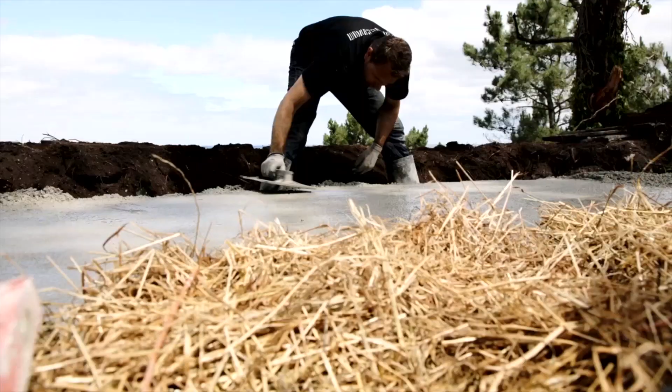So this is an early project that we did not really knowing what we were doing, just by removing and putting together everything that we found on the site, on the place, a beautiful cornice of the Atlantic, and putting together the existing matter, a bowl of soil just removed from the place, a volume constructed with hay bales,

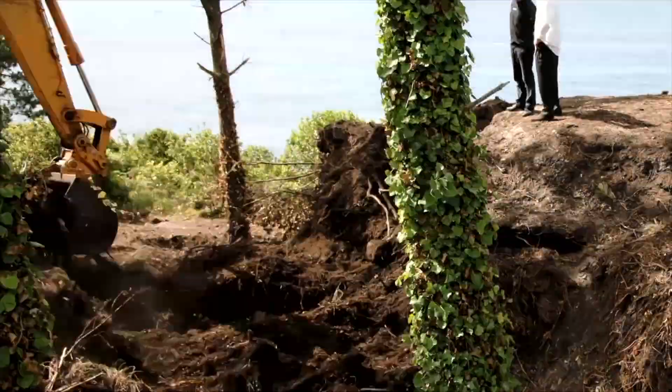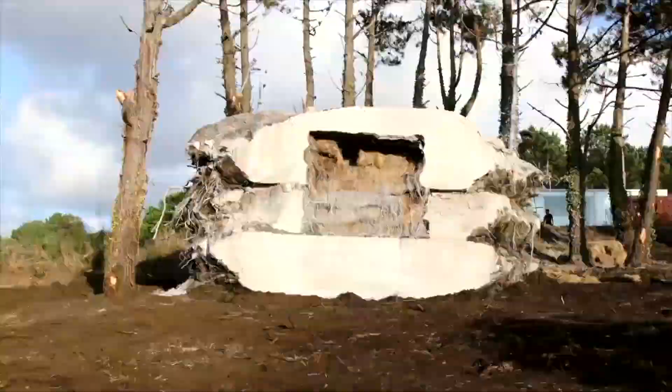and we casted unreinforced concrete on it. We covered it, we contaminated this prefabricated chunk of matter, this stone, and we let it there, like cure. And we named it the truffle. The truffle almost as a parasite of nature, something that grows informally attached to that savior, to that life that is part of nature. But it was not yet an architecture project. We let it there, rest for a while, not really knowing what we were going to obtain from it.

You can put a little bit more of music.

And what we discovered was this, like, different lives of concrete. All these abrasive, viscous, very expressive material that was reacting to the cut that we had just done, even though we hadn't yet revealed the space. No? But we were already seeing all those encounters between architecture and landscape, all those age, all those wrinkles. We didn't have yet the tools to transform that.

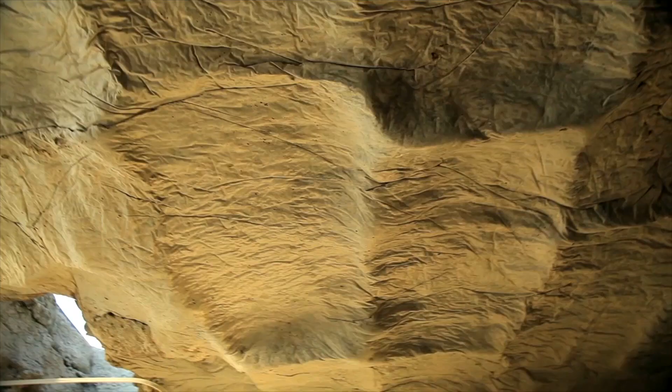All this rusticated viscosity, warm and aged already, contrasted with this liquidity of the lintel, as a petrified sea that was above the habitable space. And in the exterior, that informality that gave ultimately a figure to the truffle.

So this project stayed in our hearts for a long time, and a decade after, on the other side of the world, and this is what makes architecture so fascinating, we had a call from a couple of fantastic allies that wanted us to do something in this extraordinary, untouched landscape close to the Rocky Mountains.

In that place, these are called the Beartooth Mountains. This is where the continental and the Pacific plate collide, and it's another edge situation. It is where the Rockies stop, and suddenly there's kind of a cloth of hills. As you can see, without a tree, without a reference, without anything but cattle and wildlife,

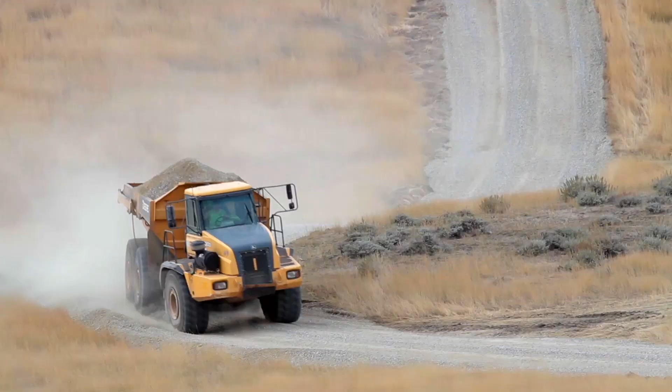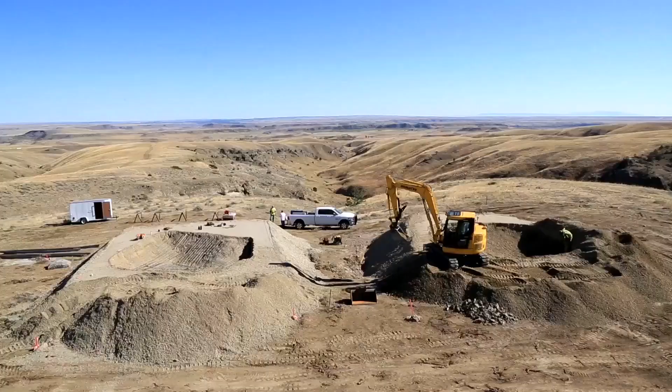but always with that mountain on the border. So we were asked to do an art center, and we declined that idea, saying that we couldn't incorporate any kind of referential building or human construct into that place. That would have ruined the experience of the program, which, by the way, was the contemplation of art, music experience, concerts, sculpture, but always in a special communion with the terrain, with the land.

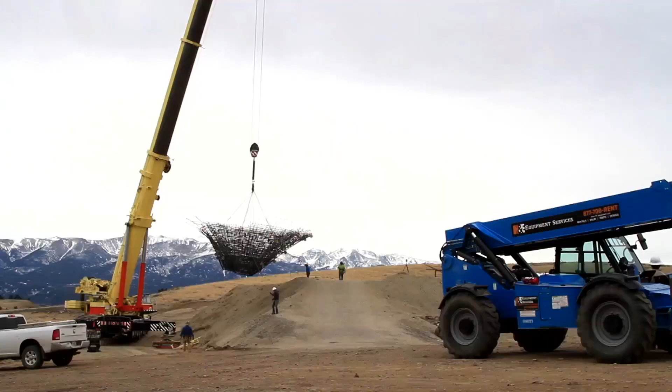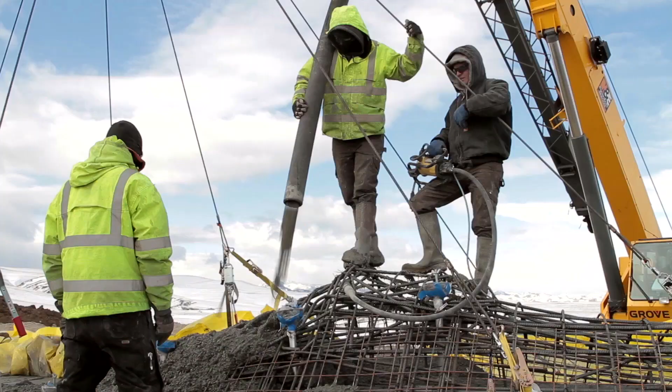So we created a craft, a tectonic, and a language that had to be, we called it, pre-architectural. We tried to avoid any kind of reference system or procedure that we had previously known. So all our actions, as you can see in this video, were to emulate the gestures of the geologies of the place, use the concrete as a very, very artificial conglomerate of all the soils, the crushed rocks, the pigmentation, but all done in a very wrong way, the anti-Swiss mode of doing concrete, no?

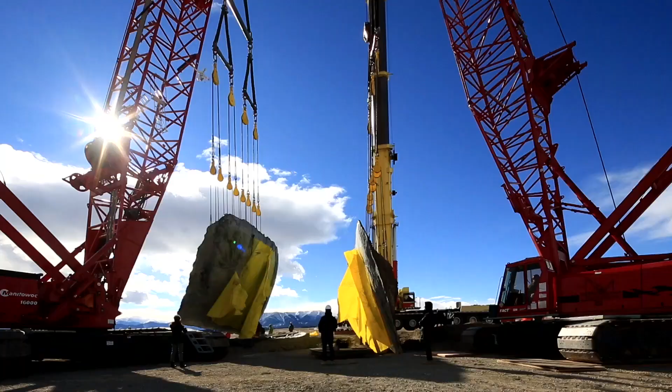Just breaking all the given rules, not mixing properly the cast, wrinkling the formwork, throwing the pigments, contaminating and giving, let's say, weaker resistance and not considering the thickness. And also reserving this fabulous moment of unearthing, of birth, no? All that excitement of a gravitational,

I would say, initiatic moment, no? That slight contact, that crush, that connection, that arch is actually the portal, the entry, the door of the art center. The art center being a constellation of pieces that refer to each other as stones or as stars that were dropped there.

So these situations of very primal equilibrium, informal and, I would say, raw, do create within the program the entries to that experiential or human world that was previously occupied by ranching and wildlife activities. No? So without being very disruptive, we tried to immediately connect with, I would say, the primal souls of the place. These kind of totemic figures.

We discovered that they immediately connected to the very sophisticated art curators coming from New York and to the ranchers. There was something in those masses, true masses that were, I would say, rooted to that place. But this is a building. This is a piece of architecture. This is not sculpture. These are rooms that have a program.

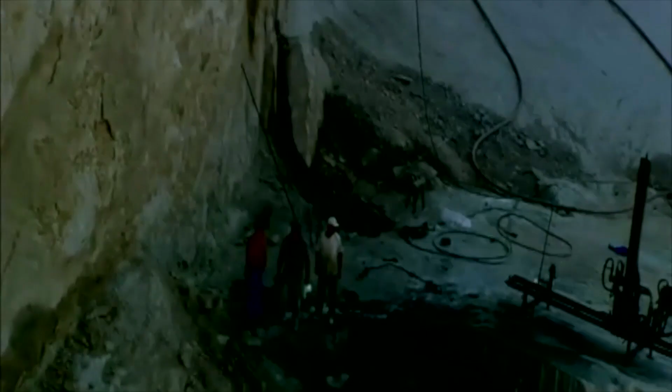Or a second project that we did in the same plot, also in Santiago de Compostela, where our challenge was to go a little bit backwards within the culture of Santiago de Compostela that is well known since the early medieval ages. But there's an outstanding megalithic culture that goes from Galicia all the way to La Bretagne, with a lot of megalithic constructions that we want to honor. So we had the capacity to somehow convince our historical commission that our look to history was longer than the city, but still part of the place.

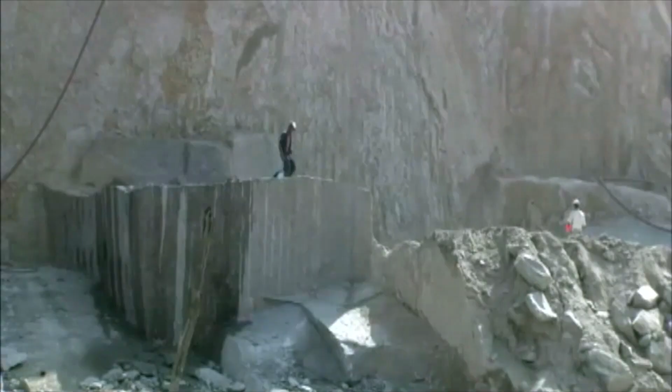So we wanted to make that connection between the megalithic tectonics and all its limitations by mass, weight, and cut of these pieces, and the context of the place. So everything starts with an explosion. I mean, it's really violent, and this is what makes so fabulous this destruction, where everything that we produce begins. So we wanted to go to that origin, to that Big Bang, to see how all these initial pieces that are obtained through explosion or through the first cuts, that are extremely raw, could be used as an immediate architectonic part.

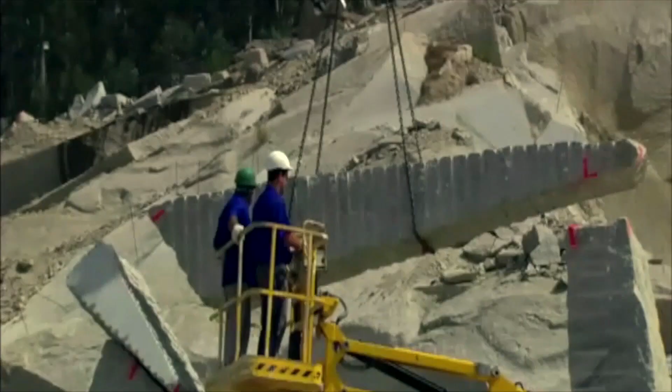Of course, we didn't have laser scans or photogrammetric techniques. This is pretty much 15 years ago. So we had to do it using the scientific method of trial and error. So we started to understand how important it was to be able to prefabricate something, to test it, to make it, to develop the technology, to develop the expressiveness, and ultimately to do the architecture project and the engineering. So everything started in the quarry, where we pretty much moved all our practice for several months.

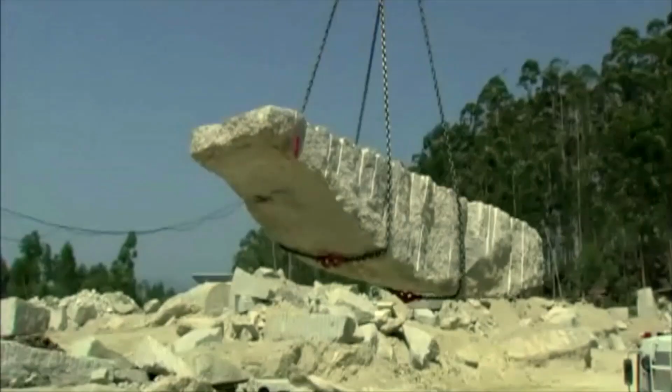I will never forget that experience, because we had to choose, identify, pretty much sketch rapidly and try to figure out where the center of masses were, more or less, so we could find a way to grab it with those chains, convince all these guys to use their tools on our behalf, not just to crush those stones or cut them, but to precisely locate them in the places and in the order that we were dreaming of, because again, we had not yet done the project. We had the license, we did something to serve the municipal government. It was blurry enough that we could pretty much do anything.

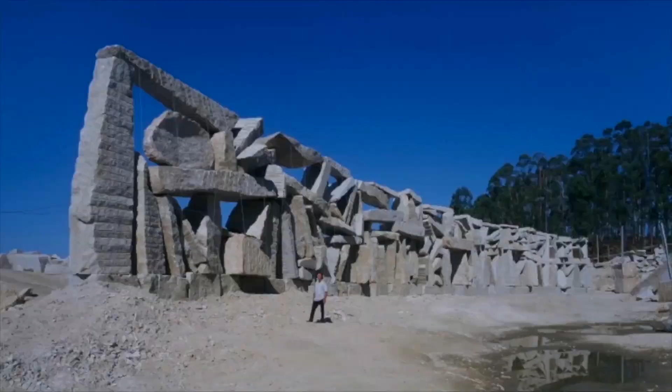And here is where we make use of the art world, because everything that is artistic is free. So even though it's a structural wall, perfectly performative, and it weighs 1,000 tons, we could hide this structure under the idea of being an artistic facade, or I don't remember how we named it. The fact is that we started placing one stone after another, and that went out of control, and we actually built the full structure in the quarry. It was beautiful. We measured it, and I still remember when I called my engineer, and he came to the quarry. He says, "It looks pretty good, actually."

But there was no way to anticipate the performance or the behavior of all of those stones that were placed there. Even though I always say that this is the most stable and safe structure I've ever built. Firstly, because I did it twice, and I could correct minor encounters. And the fact is that when we dismantled it to redo it on the site, here we were also the contractors. I operated as GC, as general contractor here. I think it was the only way to be capable to do it.

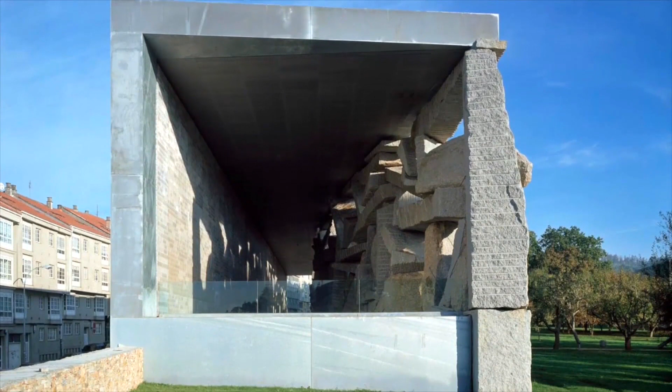But we discovered that once we had placed those stones in the quarry, by signing with a red spray where those gravitational connections were happening, we really were able to rebuild it in a fraction of the time, in a very safe condition. It seemed like those stones had already found their place and they were comfortable in their position. But again, the ultimate idea is that all these chunks of matter, redistributed and reorganized, become part of the architectonic part.

And now I'm in Menorca. Music, please. And this might be, I don't know, one of the last projects I do with this attitude. And this is the most radical, because in this case, I'm just not doing nothing. I had the fortune and the chance to find this beautiful abandoned mine in Menorca, and I just have to clean it and use the technology not to ruin it.

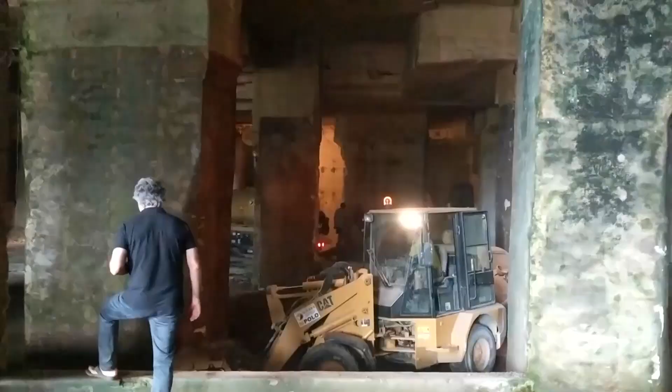And find a program, by the way, because I know I love it, I want to use it, but I don't know what to do with it. So we started this by inserting light and air, no? As this first stone, this ceremonial moment of birth of architecture. We did all this event of chopping a stone from the lintel of the quarry with a little olive tree that arrived almost dead.

But we put it vertically, and through this oculus that is 9 meters deep into that gut of the terrain, we understand this is the first stone, the keystone of the equilibrium of all that given fruit of the earth. The rest of the project was 3D scanned. Look at these beautiful drawings. I would love to say that these come from my gifted hand of representation, but they're just the 3D scans.

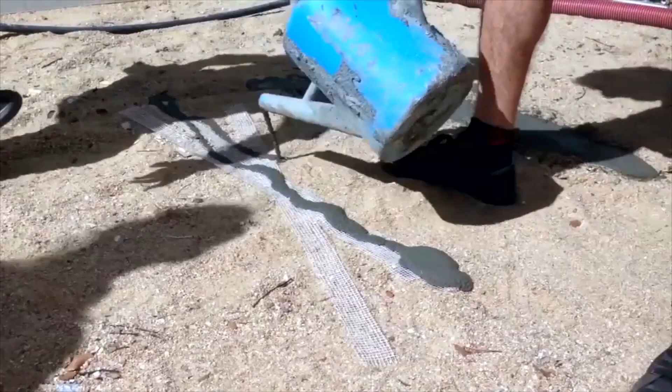Now we are doing. When I mean now, I mean that I was doing it yesterday. So not this part, but what you're going to see in the last. I think it's a non-edited video that I produced rapidly. But I think it was interesting to understand our vision of the architecture of the earth.

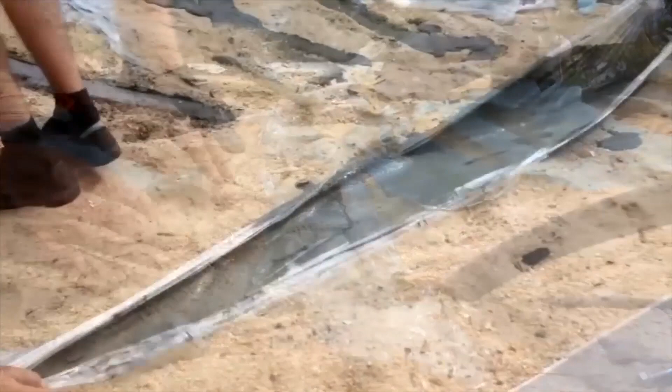This is an installation. Installation is a hybrid between an art piece and an architecture construct that we were commissioned to celebrate a big exhibition that's going to be held in New York, in the Cooper Hewitt Smithsonian Museum, about nature. So they told us to do something in the beautiful garden that they have in front of Central Park. So we presented, and they accepted it.

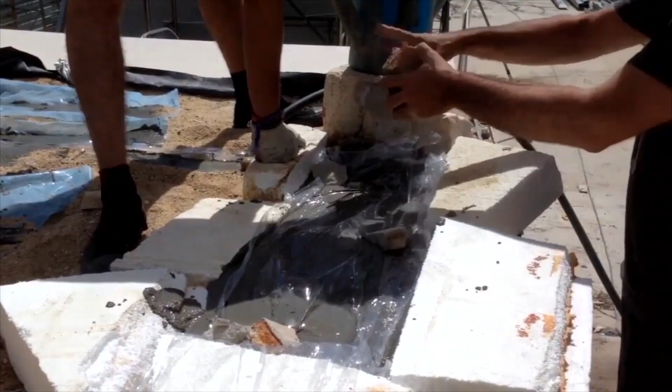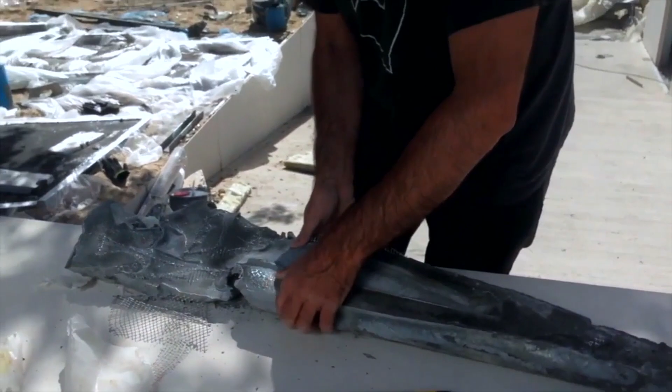We said that we were going to prefabricate a river. We knew that before architecture came to Manhattan, we gridded everything and we flattened and we have that beautiful and amazing city that we all love. Before, the island was full of hills, rivers, and a lot of natural beauty that was not erased; it's there, it's kept, it's hidden, souterrain. So we're going to lift it, and we're going to fabricate this metaphor into a massive concrete structure.

So that river, this is all, I would say, the sketching process where we produce a lot of rivers, and some of them were structural, some of them were part of the standing point. So all these traces of structure, these beams, are performative like any other structure.

In the meanwhile, we were commissioned to do a little passerelle in China. So we used this same idea to create a bridge that was not jumping from street to street, it was part of the river. So this bridge was designed through all those traces, and we faced here a dilemma, is that we loved them all. We didn't care which fluidity was part of that building, that structure.

Understanding that when that concept is clear or knitted enough, the formal aspects of it are pretty much irrelevant. I think this is something that is very, very surprising. It's like if you look at stone, and another stone, there's no formal preferences.

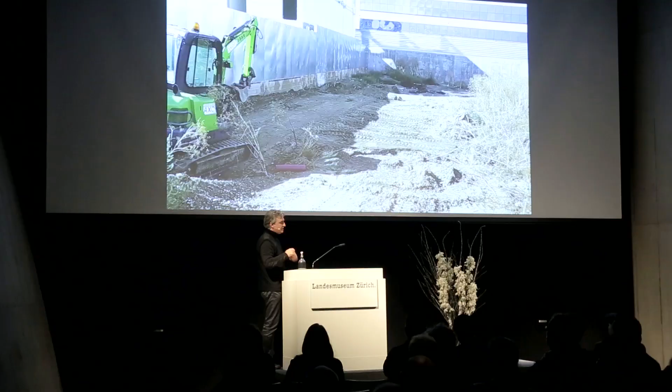So after all this back and forth from a conceptual part to a more urbanistical relationship with the landscape, now we are abstracted, and these are images of last week, pretty much, where we did the prototype. It's not the real structure, but we did a prototype, and the prototype is in scale, I would say, 1:2.

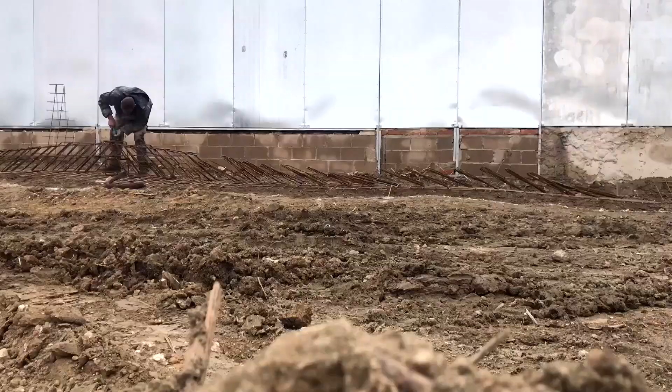So we will build another of these petrified rivers for the museum, but we wanted to rehearse it, to test it, not only mechanically but also the materiality. So as you can see, everything departs from the terrain with small preparation, a lot of uncertainty, and this is the contradiction: how the formal and, I would say, metamorphical uncertainty that is given by the fluidity of the concrete when you let it loose has to be combined with a total precision of where those tensions travel through the guts, the reinforcement.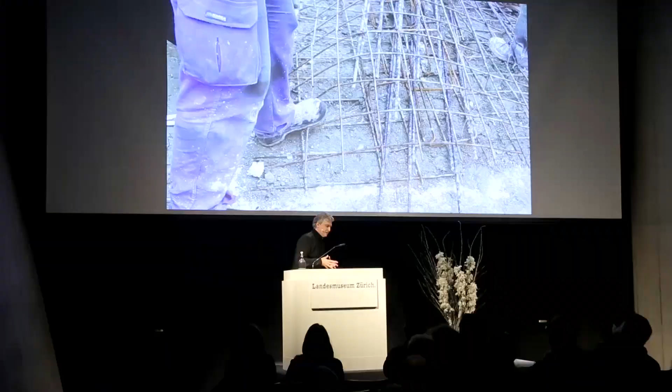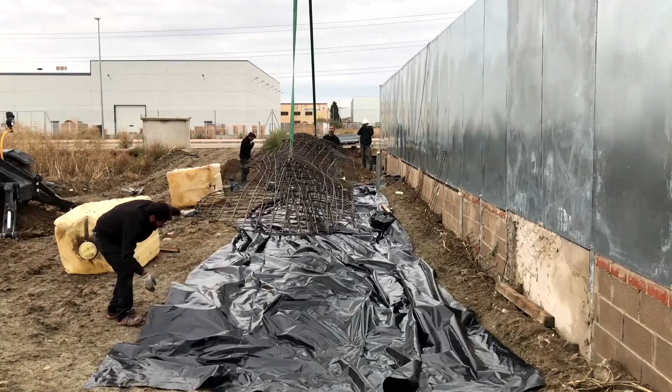So the combination of what you leave as freedom and what you control as the driver of that freedom is what we were working. So we decided to make a very simple differentiation. We were going to fully control the reinforcement and leave the liquid part of the composite beam pretty much flow and create that beautiful and poetic form.

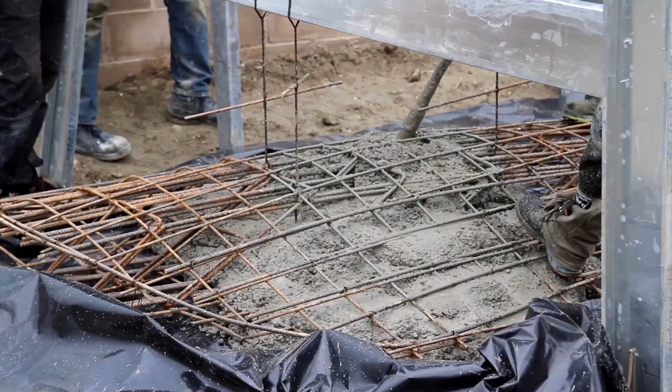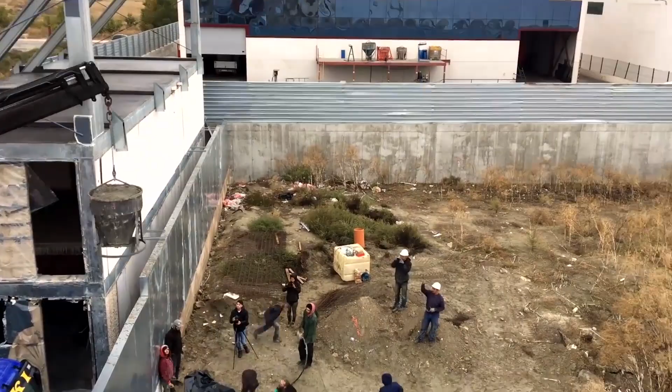The specific characteristics of this technique is just controlling with a little bit of extra sensibility the plasticity of concrete. So we just add more fluidificant or more water, depending on which part we want it looser or straighter, or just to maintain it, and the amount of vibration. So somehow we are working with that forces that we apply constantly to matter, to try to depict with them the ultimate appearance of the project.

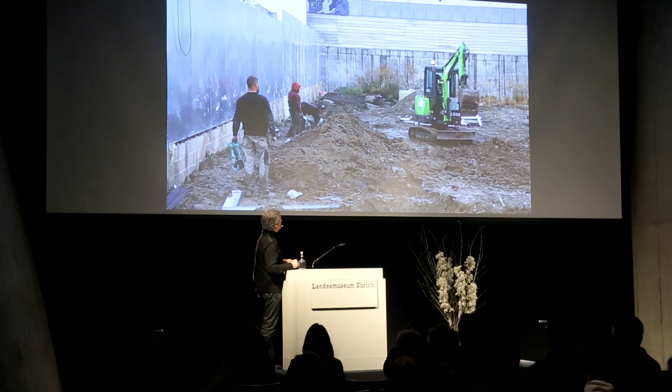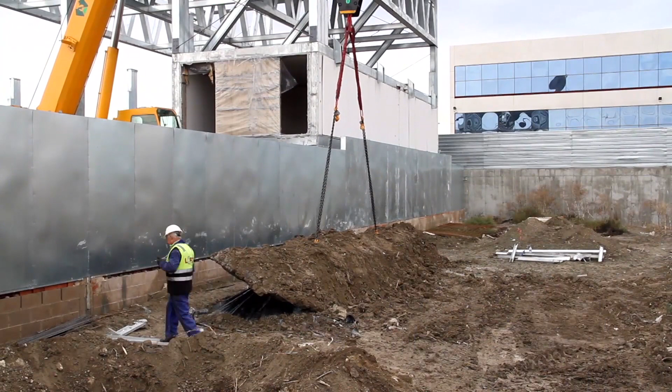Again, we want that contrast between the part of the river that is unearthed and the part of the river that is pressurized, fluid and liquid, and crystalline. These two natures that we firstly worked out in the little truffle, again in the structure of landscape Montana, here is revealed as a very intrinsic part of the expression of this piece, no?

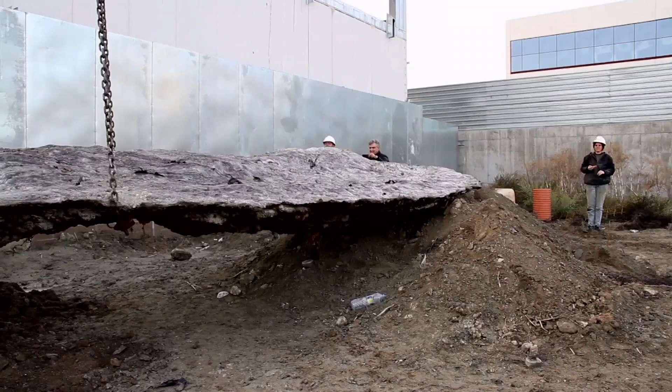Dangerous stuff. These 22 tons became a structural beam that worked out very well in the deformation tests, like any kind of architecture structures. But formally, it had this kind of appearance, this kind of abrupt and very expressive face, surface, where we could ultimately create that landscape, an onirical scale landscape, and also that, I would say, stiffness enough to fly and to be kind of unveiled over the existing soil.

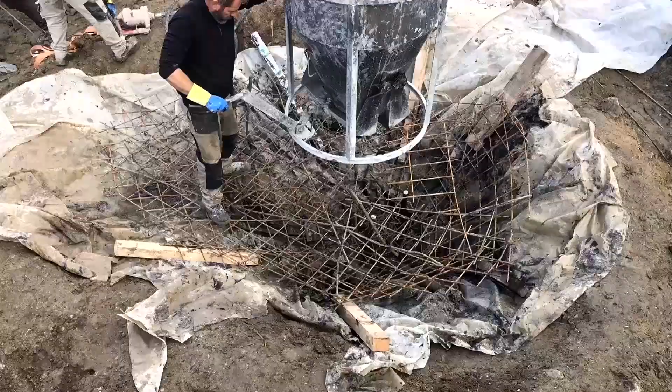The other piece where the river flows is to a lake, a pond, or the sea. So we are creating a big vase, almost like a Baroque fontanone, no? Where all that water and all that inertia and all the equilibrium of this long structural trace parts. But this structure that we casted last week has a very important engineering prefabrication skill. It will pretty much fit in the middle of this auditorium, a little bit smaller, but it has to be transported to New York.

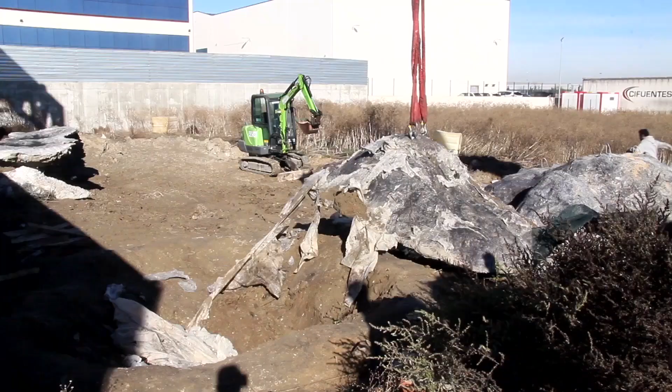So we're using prefabrication techniques of breaking that vase into parts to be able to reassemble them, like in any building. The difference is that while in buildings we love to distinguish the parts or disvanish them with an unseen joint, in this case we wanted that joint to be a wrinkle, making that match of the liquid wrinkle part of the argument. So the prefabrication is independent of the formality of the building.

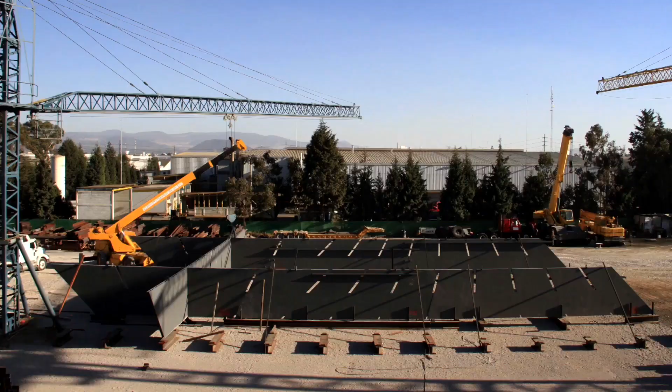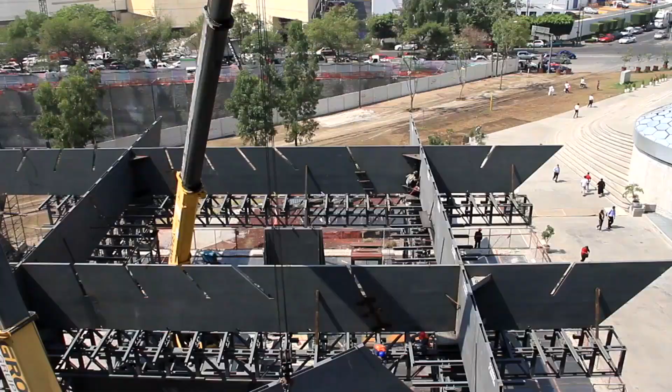This is a theater that we built in Mexico City, where the nature of the assembly, the prefabrication of the parts, was also part of the tectonical logic and the form. We wanted to create another stone. In this case, we call it, in Spanish, la piedra del sol, the sunstone, la dovela, la clave. These are very, very metaphorical visions of Mesoamerican Azteca culture, no? Of almost sacred pieces of their imaginarium, no? That relates the sun as a stone to the figures that we create as humans as stones.

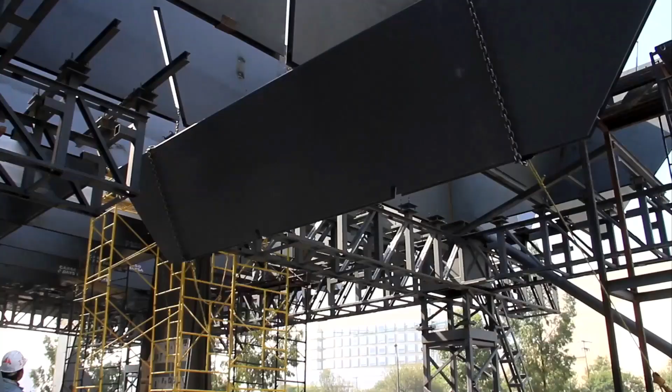So I wanted this capacity of the sun, the light, and the gravity to be combined in a special way that you could feel all these presences. It's just a structure that levitates over a big hole in the ground.

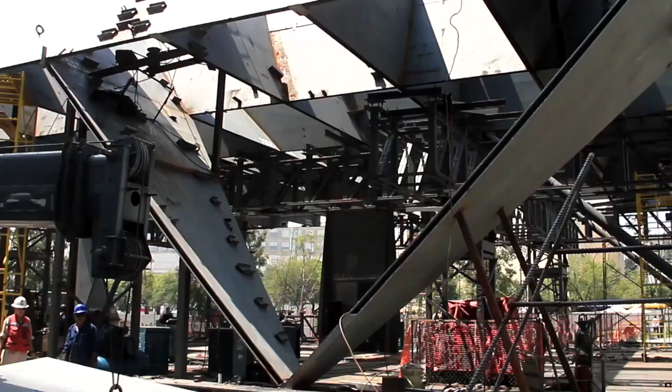So everything was the equilibrium of a big excavation that held the black box of the theater, and that levitating stone combined with these bidirectional steel plates that would operate as a very symbolical figure that could represent the existence of that hidden gem, that space that is totally excavated.

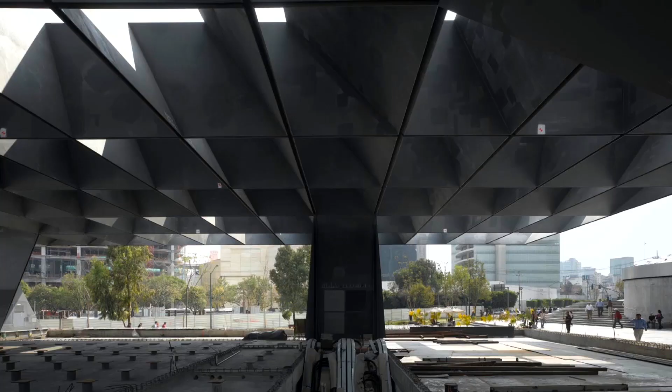No? So we built all this excavation with everything covered, and one day we just opened, and most of the people that were in the rest of the buildings didn't realize what was going on inside. That was a very interesting moment, no? As you can see, this dovela operates with its deformations over the 4 columns that hide into their form, their deformation, and their position. They hide their gravitational consistency, no?

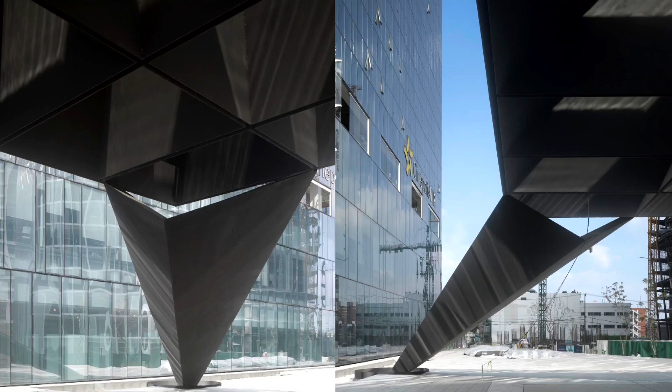And that's why, let's say, all the gravitas, all the weight, and the distinguished light that becomes part of the matter of the stone, not as a projected light, is what makes that construct of the dovela interesting.

In the point of view of the place, of the city, this little building was surrounded by huge towers and museums and big buildings. So we wanted to make a very, very silent, 5-meter high canopy where the presence of space was defying the formal monumentality of the neighbors.

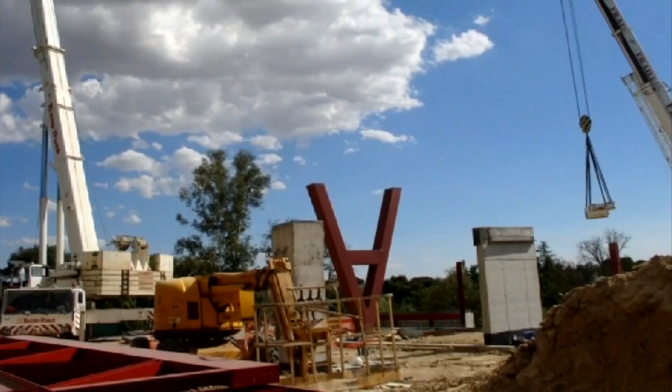And in parallel to these last projects, we were building a house, the Hemeroscopium house, where we wanted to celebrate this logic of prefabrication to the ultimate case. So we just went to a catalog, off-the-shelf civil engineering, I-beams, slabs, vaulted artesas, I don't know how to say in English, this beam. And we just reorganized them in an unprecedented way.

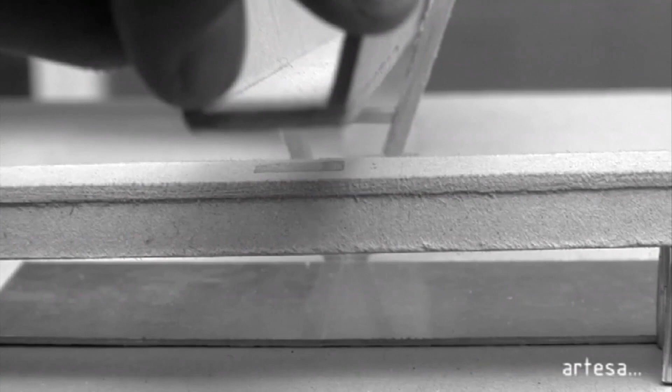Again, differentiating between its formal conditions, the I-beam, the U, the slab, with the pretension and the post-tensioning connections that were all, as you could imagine, fully custom. But I wanted again to detach the performance, the stresses that flow through the guts of those forms within its form. And I think this is what concrete offers us, this versatility of operations, of performance.

In terms of the formal aspects of each of these pieces, we're just interested in creating a gravitatorial itinerary, a helicoidal transit of that transmission of gravitas to create a certain space that was balanced by the action of those heavy presences, those heavy traces of those beams that were defining a space without enclosing it, a courtyard house in this case.

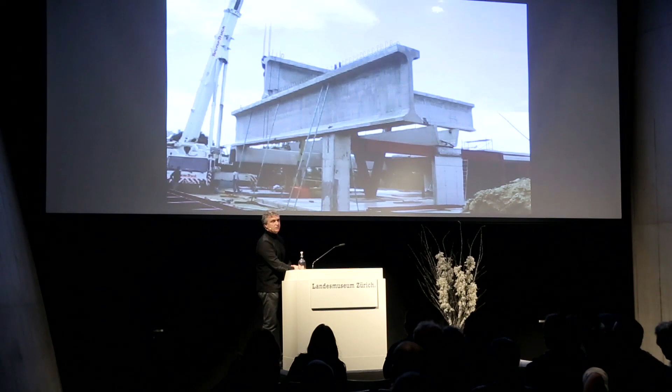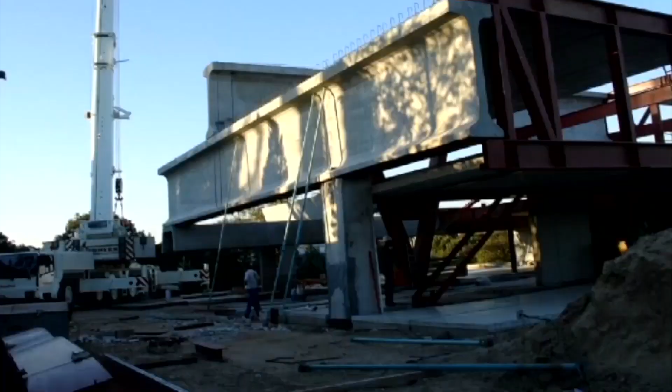And ultimately, what we were, again, surprised is how the space became extraordinarily light and transparent and fluid, even though it was constructed by these very, very heavy pieces. Heavy and pretty much soulless pieces. How indifferent is the form of an I-beam to the rest, even though it was designed that way to really perform efficiently.

But it becomes part of a cornice. It becomes part of a facade. Suddenly the beam is not a beam anymore, it's part of a wall. So it acquires a different significance just by participating in that conglomerate of pieces, just by being incorporated to a system and just by detonating that spatiality. That spatiality that was cut.

That itinerary of gravity was counterbalanced by that keystone. Again, the same word with different meanings. That keystone that we call the G-spot, that is perfectly located and closes the balance of the structure. And that was a gift of the quarry guy.

And this is the result, the transparency, that integration of those traces to the wrinkles of the landscape. It is the reversal of what we tried with the truffle, where all the space was wrinkled and the landscape was providing the single line. So I think these dualities between geometries, masses, and forms is what become part of the architecture discourse.

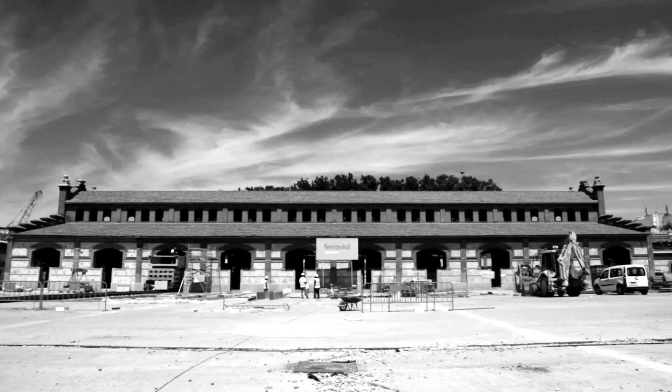After doing this house, we had the chance to do a historical transformation of a slaughterhouse into a mediatheque. And this building was fully protected by municipal government, untouchable. So the only thing that we could do was solve the hygiene of the walls, incorporate MEPs. But by doing this kind of celebration of the engineering, we could convince everybody that all these pieces were part of the mobile, of the furnishing of the house. Something that you inserted through the door or through the window.

So it was accepted, even though each of those weighed 50 tons and they have an independent structure, but they were part of that mobile tectonic. It came up, it was inserted, almost sneaking into that space, not becoming part of it, not touching it.

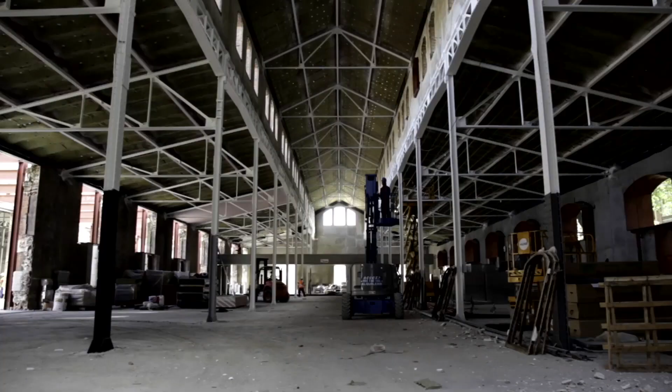So here we learned another lesson about the structure. Structure of a building doesn't have to support anything. It has to contain. It has to add order. It has to provoke that kind of dissonance through its presence. This is the kind of exercise that we produce here. We inserted into that system this very impure, almost unprecedented part that pretty much contradicted all the existing structure.

The collision between the fragility of that metal structure, the trusses, no? The order, the vertical, almost a basilical space, being contradicted or sometimes defied by those, let's say, transversal and horizontal traces that didn't touch each other, but they operate simultaneously as a sole structure. I think this is the most surprising part of this project.

No? This collide, this encounter of these two artifacts that don't recognize each other, don't touch each other, don't even respond to each other, but they were working as a unit. No?

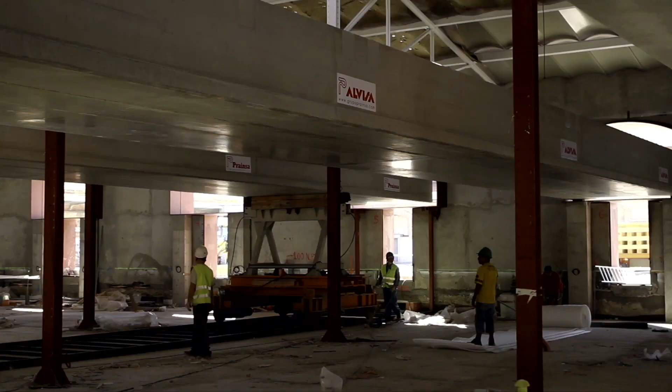And all this could be again done through the development of these prefabrication techniques. No? So we have to use the craft of the engineering and the logics of the offsite to respond to our ideals. And I think this project does respond properly, no? By inserting and doing all this kind of engineering effort just to introduce these structural parts into the core of an historical building.

And by doing that, the transformation was integral, and the basilical slaughterhouse never felt again as that industrial building. Suddenly, the space had been extraordinarily reinterpreted. And I think this is one of the most important goals of architecture in these interventions in existing buildings that do have a history and do have a past that is sometimes difficult to transform.

This compound of slaughterhouses in the center of Madrid, in Matadero, now is part of a cultural network of emerging art and initiatives, younger initiatives that used this pretty much residual infrastructure, but required a total reinterpretation and transformation.

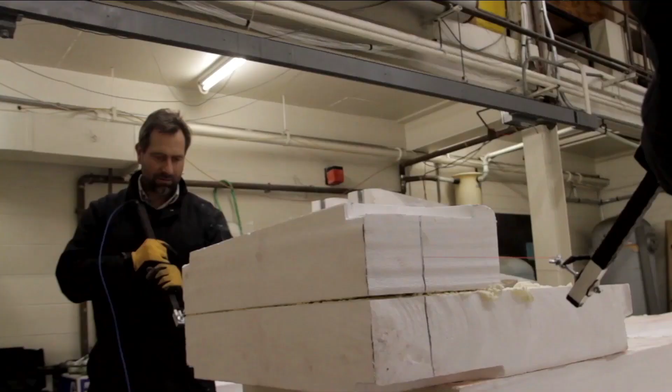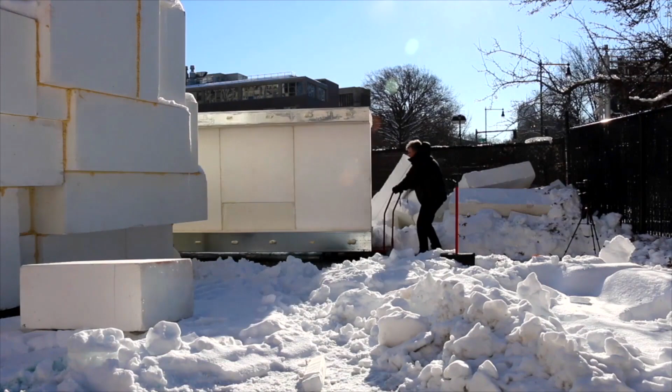So all these buildings that I've showed you occurred before, except the ones in Montana. But this before I went to the United States, to the MIT, to found a lab called the POP Lab, Prototypes of Prefabrication. And this occurred like 5 years ago when I moved there, and I had already been researching all my career, so the idea of starting research was kind of unpleasant. So what I did was to continue the research, but challenge everything that I had done before as a mental exercise.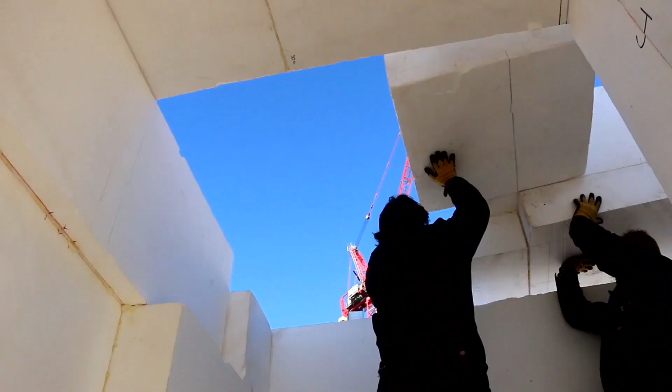So I started building these I-beams, colossal big I-beams, but they didn't have the mass. They did produce the same weight in terms of the space, the presence, the trace, but they were lacking the mass. Instead of being pre-stressed concrete, they were post-tension foam. The same, I said, okay, let's try to do a construct like the ones that we did in Santiago de Compostela with those heavy lifting stones, some of them close to 30 and 40 tons. Let's do that with these blocks of pretty much air, foam, pretty much like a model.

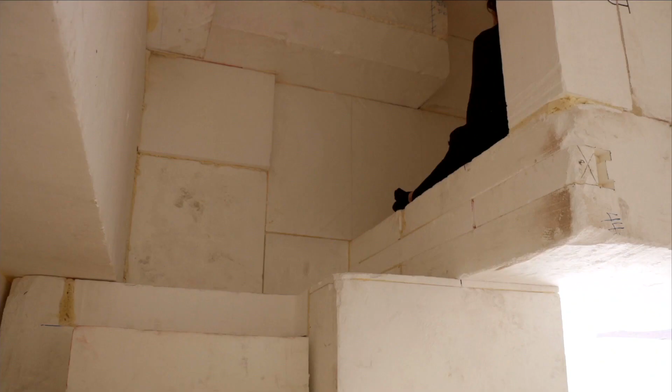So we could pretty much carry them, and because I wanted to experience the idea that intellectually I had been following, I wanted to see the empirical evidence that architects sometimes confuse the terminology of weight as a force or weight as a mass. And what really interests us architects is the weight as a force, because that's the one that detonates the spatial experience. The mass per se is a characteristic inherent of matter that could only be experienced on the bascule. So we kind of enjoyed the lack of mass. Still wanted the firmitas, the weight, the presence, the cyclopean.

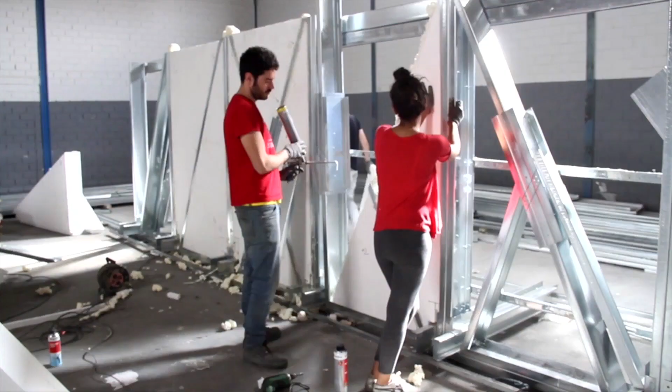So I spun off the research immediately. I'm that kind of academic that cannot be in the academia too much. And I went back to Madrid, opened shop. Even though it was with some of my students, we decided to build a house immediately ready to be built, with an outstanding challenge: I wanted to build it in Madrid and ship it to the United States. So the prefabricability had to fit the transportation networks, had to be light, had to be strongly insulated, it had to be performative, it had to be up to code, it had to be a piece of architecture that was going to be erected above an existing garage.

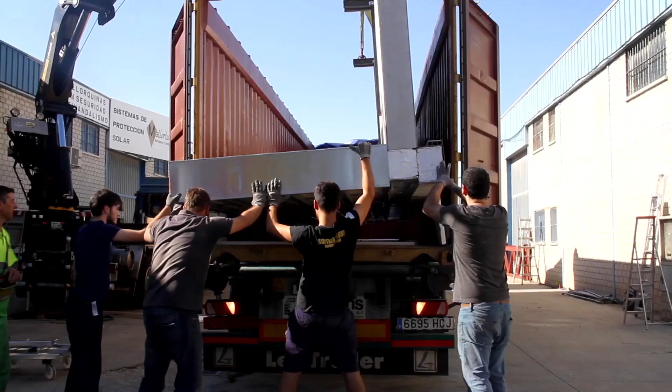So it was, I would say, a la carte technology that had to respond to Débora and myself, our idearium of let's find architecture that has no mass but contains all the weight, and is capable of being flat packed and transported overseas. That was a challenge. So we built it. It's actually our office in Boston. And as you can see, it settles above an existing structure, so lightness helps very much.

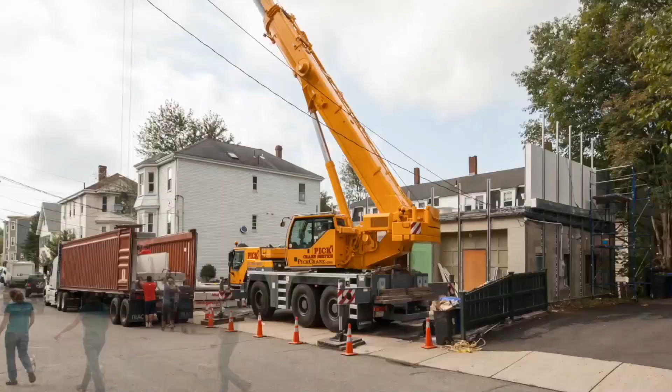And we had to develop this encounter of traditions. Here we put together the tectonics that we love in Europe, the big pieces, the prefabrication, etc., with the logic of the Anglo-Saxon systemic 4x8 panelized system. And we built this kind of multi-purpose space that serves as office and as family room, as extension of our living space that is below in the garage.

But this is our ground zero of what we're working on now, because this opened our eyes and the appetite of some business investors who understood that all the industry of construction in the United States is moving to prefabrication. It's merging to offsite. Buildings are not taking advantage of any of the tools that we have available. I'm talking about advanced manufacturing, robotics, this kind of matter-to-data connections, things that we do continuously in our labs, but the industry is not yet ready.

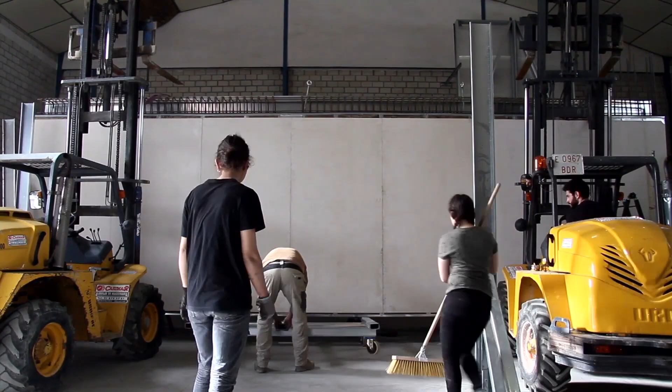So we started to be prepared for this wave that might impact especially architecture design as it is today and engineering. And we are actually building Ensamble Fabrica as the factorial lab on a bigger scale, where we started to redevelop all the pieces and parts that we had done for our house.

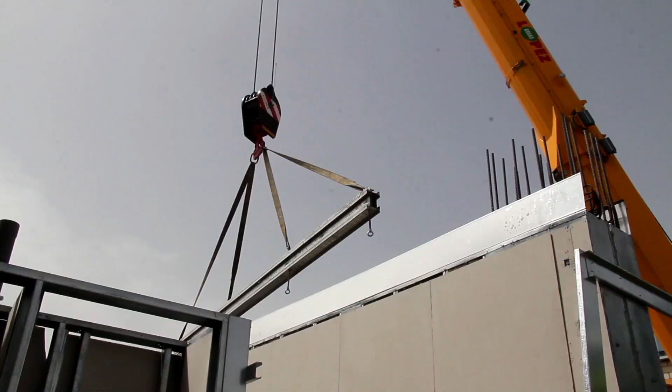I cannot disclose all the tricks because I would have to kill you all, but the fact is that the technology is pretty much taking advantage of two traditions: the European, where we do buildings in concrete, and the North American, where buildings are framed in light stud material. So if we put this together, we understood that walls, beams, and slabs could be engineered taking advantage of all the manufacturing, robotics, prefabrication parts, and lightness.

This is the key part, containing all the different parts of the building except the liquid of the concrete. So I'm dissociating again the performative part of the concrete structure and the conglomerate. In other words, this is the demonstration, and I wanted to do this by prefabricating with this technology la unité d'habitation. And as you can see, it's pretty much this. And this is kind of the anti-domino house.

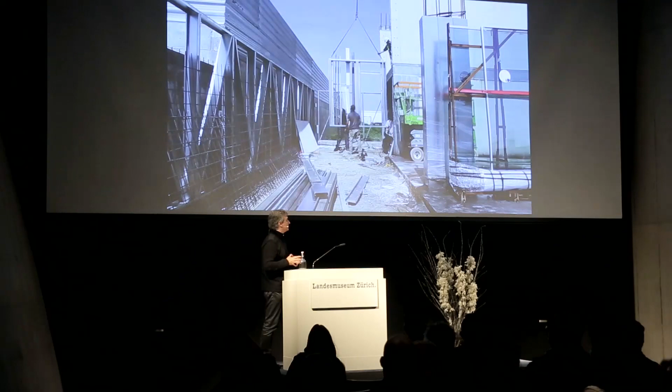We've been obliged to do the bones of the building, the first thing, the domino, and after you fill it with other parts. In this case, what we're doing is exactly the contrary. The first thing that we do is all the building, layer by layer, except the domino that is injected at the last minute and ultimately provides the performative stiffness of a concrete building.

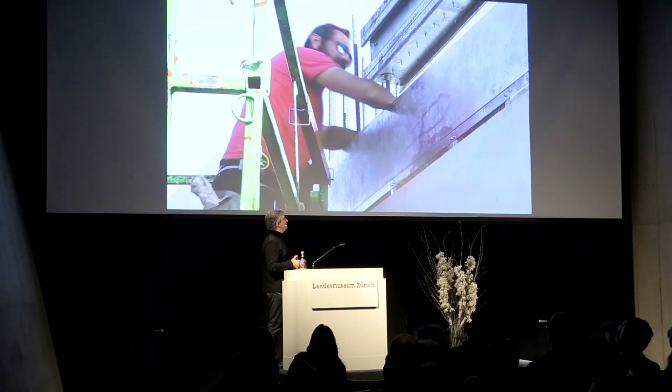So this has taken us to the point where we are now working to develop a lot of structures that we had never done before to serve a research and entrepreneurial commission, where architecture is fully flat-packed, pre-manufactured in ultra-lightness off-site, that could be transported not only by flatbed trucks, but could be inserted in a container. And this suddenly opens the marketplace worldwide.

And once it's assembled, it contains the stiffness of the most universal and available of our materials, that is concrete. So to do this, these are also pretty recent images. We're now under construction of this new understanding of what a studio is.

What I've learned by being at MIT is that the practice of being an architect is challenged. Maybe here in Switzerland or in Spain, we still enjoy the pleasures of being an architect as a master builder, where you have the conversation open about engineering, about craft, and the interactions with the construction place. This you all know, of course, but in the rest of the world it is very difficult. The architect is kind of a designer that does some drawings and leaves them aside to do others.

And what I've shown you in my early 21 years of career, we were the builder. We were the master builder of all our buildings. That's what we enjoy the most. So now we understand that to maintain that condition, we have to make extensive use of the capabilities of technology and try to connect the data, that is the project, the idea, even money is data, to matter.

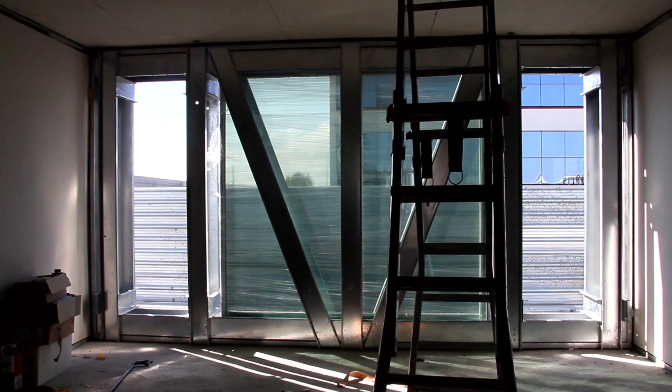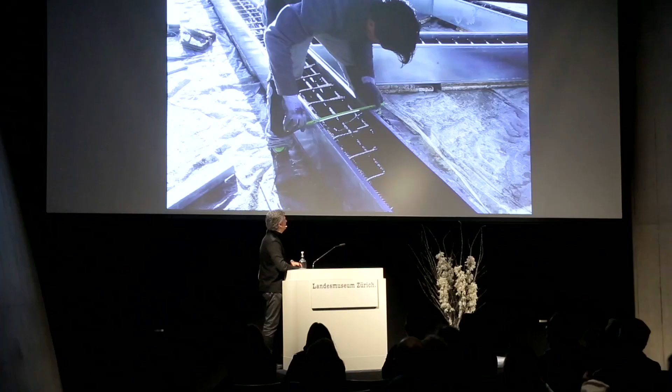Shortcutting everything that we have in between, the contractor, the subcontractor, the executor. And I think this connection is possible and is how I anticipate we could transform how we understand today the practice of designing and executing the construction of a building. This connection, driven by technology, not only through the engineering and design process, where we are already there, but creating the connections to the parts that fabricate all these elements, is what I think will make the big transformation.

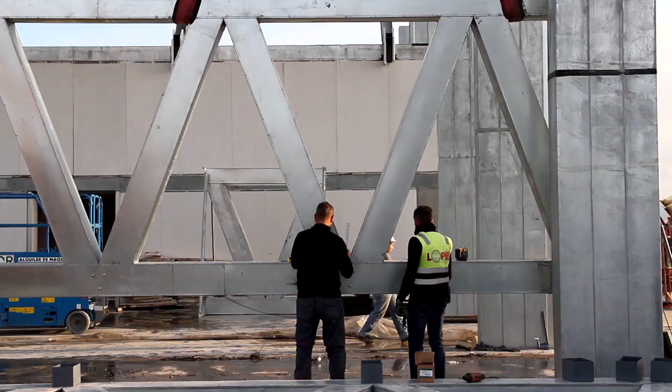Here is what we are doing with our technology. These very light, but self-supporting, cold-formed trusses. That's a 20-meter span truss. That is either injected with the concrete when it's already outstanding above with some shoring, or could be done in a traditional way, cast in place and lifted today. But it could be prefabricated offsite. In this case, we're doing it.

All this construction, we're doing it ourselves. That's why it's taking us so much time and effort, because everybody that you see there are part of the Ensamble Studio. We're not working with contractors, because the next phase of this project is to upscale this to a greater, let's say, typology of high-rise or mid-rises that we are now designing, that is just extending the usage of these logics of lightness versus weight. Thank you very much.

Thank you very much, Anton. I'm a little bit speechless by the power and poetry of these images, but maybe the audience is not as speechless as I. I want to open for questions.

Hi, thanks for the lecture. I was really amazed how much you spent in the pre-process and how much you think about how the buildings are constructed. Do you give so much thought also about the life cycle of the buildings and how your materials will live on? Because it's nowadays quite an issue, the reusability and recyclability of buildings. Is that a thing that you think about?